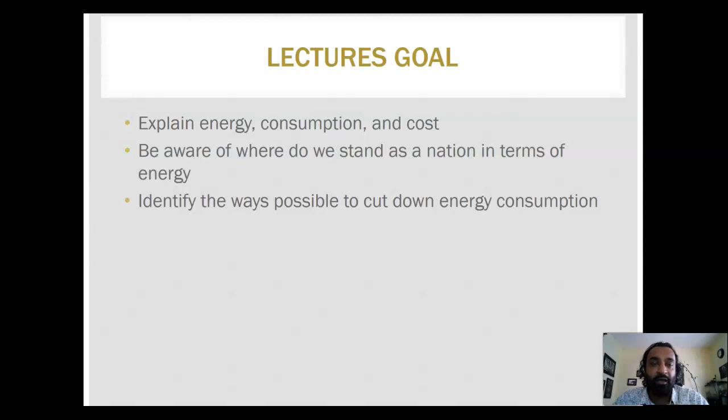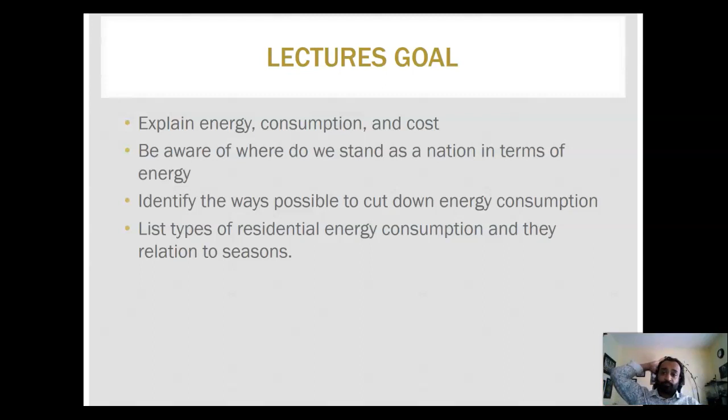What are the possible ways to cut down energy consumption, and what can an individual do? What can an individual do, and what can we do as HVAC technicians? We'll list types of residential energy consumption and their relation to the seasons.

We'll start with home energy. If we think about residential energy from the beginning, we wouldn't be here in New England without proper heating. Probably a lot of places in the south, like Texas or New Mexico, wouldn't be habitable without air conditioning. However, Native Americans did manage to live in cold areas, using simple methodology to cool, heat, or ventilate their houses.

If you look at primitive houses, whether Native American here, or some houses in Africa or Asia, there are ways to heat and cool houses without residential energy. If you look at passive heating and cooling, you can find houses in New England that don't require any heating or cooling system, maybe just a small stove fire. That's something to think about while we design heat systems for residential energy.

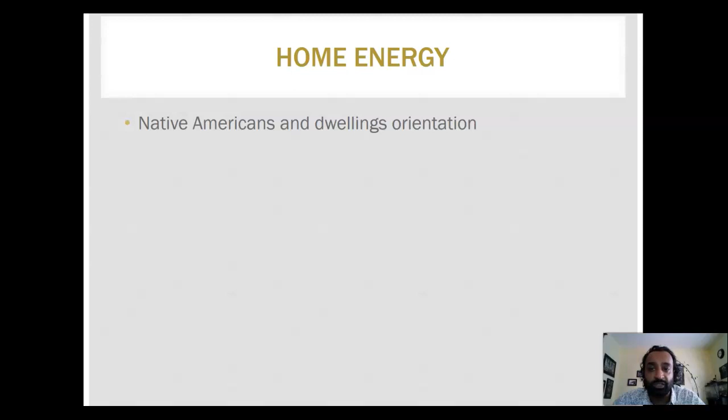They also used white colored houses. The orientation of the house makes a difference in how much energy it absorbs or rejects, and the color makes a difference. If you look at south of Spain, you'll see houses painted white to reflect the sun's rays and reduce energy consumption for cooling.

The chimney effect - if anybody ever had a tent or went camping, they probably used the chimney effect, where a hole in the top of the tent draws air using air buoyancy. It's good to use nature and gravity to move things around, and the chimney effect is based on air buoyancy and density difference.

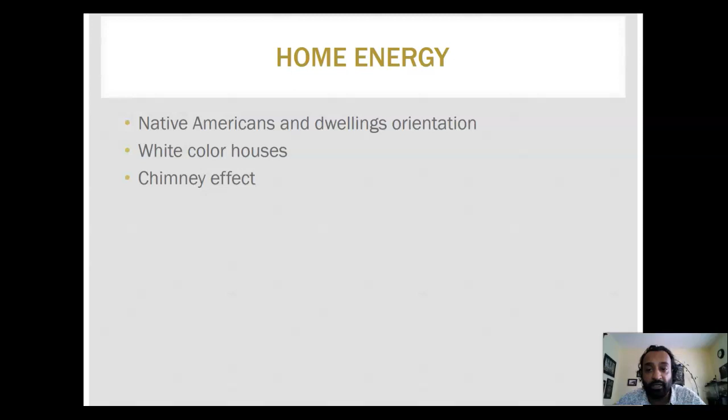We know hot air rises and cold air sinks. So if we have a source of heat in a tent or chimney, it will naturally rise without any need for forcing it out. And as it rises, using the pressure difference, it will pull air in. We'll talk about that elaborately later on.

Building material has a big influence on heating and cooling. How is that? We will see this when we do the little project where we pick up material and see what the insulation is for that material and what the heat transport through that material is.

In the past, people used mud, hay, or stone for construction. These materials are natural, available, and help modulate the temperature inside the house. It's not very practical to mass produce mud, hay, or stones - even though it's still done, the cost is very high. With modern construction, we were able to find new, cheaper, and faster materials to produce, but they came with some drawbacks.

Recently we became aware of our energy consumption. We're trying to retrofit and find material that has better resistance to heat loss and heat gain.

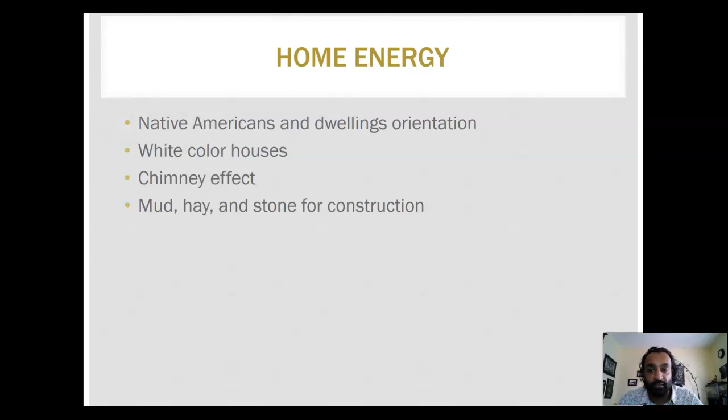As I mentioned, the Industrial Revolution and the boom of housing that happened between maybe the 50s and the 80s - material was cheap, they were trying to do a lot of mass production, and energy was relatively cheap, especially before the 70s. So there was not a big concern for house insulation, or a lot of awareness about greenhouse gases and these kinds of issues with climate change and global warming.

So we were able to pump as much heat as we want - it was very cheap, so we were able to save money by having cheaper, more economical building material. Now this story does not apply, and we have to be more conservative, since there's a lot of evidence that we have reached peak oil, and we cannot sustain producing this amount of carbon monoxide or dioxide.

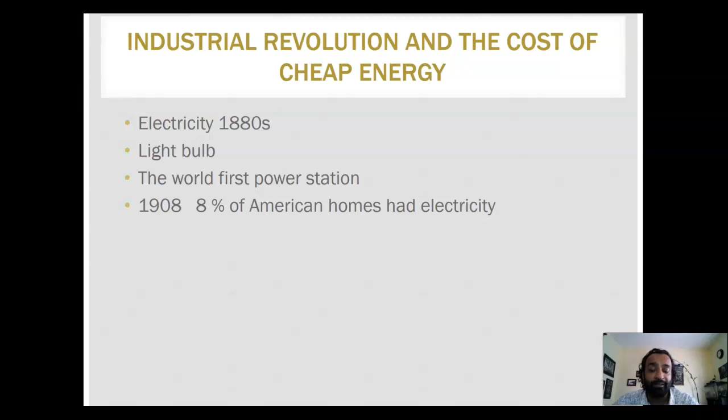Electricity came in the 1880s. The light bulb was invented - more consumption for energy. The world's first power station came in the late 1800s. In 1908, 8% of American homes had electricity - that's really small. Compared to 1925, half of American homes had electricity.

Probably now around 98 or 99 percent of American homes have electricity, so consumption has been increasing as the population has increased. Natural gas started in 1930, and now we have 50% of natural gas resources. The human population in general has doubled in the last century, from 4 billion to almost 8 billion. So that's really a lot of consumption.

So the need for us to be more conservative is there, and to find ways to have a sustainable way to heat and cool the houses.

Today, meaning around 2010, probably 80% of homes have ACs, air conditioners, and it's probably more than that now. There are more needs for people to install air conditioners in New England now than before. As you've seen, this summer, 2020, was the record for heat and hot days, and this will continue, with more temperature every summer. So there will be more need for installations.

It's good for us as a business, but it's not good for the environment. So hopefully we'll find ways to make things a little bit better.

In the US alone, we represent 5% of the world population, yet we use 25% of the world's energy supplies - that's a very big percentage. With globalization, a lot of countries are trying to follow the US model, and as you can see, that is not sustainable at all. As other countries get more advanced and industrial, they try to live the same lifestyle we live here. Meanwhile, we have to correct our lifestyle here to make this power consumption more sustainable.

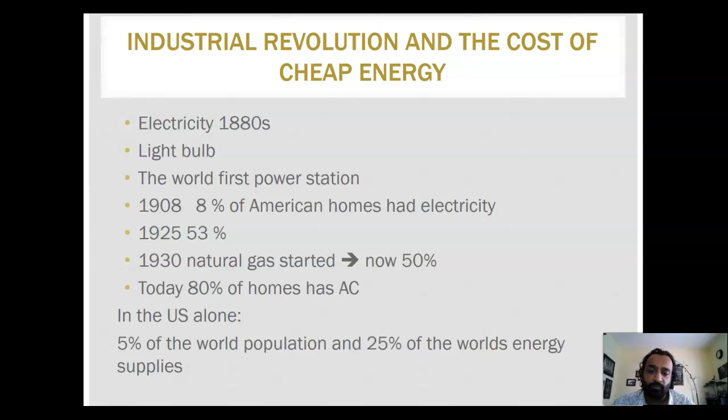Okay, these things can get political. I try to stay on the science and technical part.

So global warming is fact or fiction. There's what's called climate change, which means the cold climate is getting colder and the hot climate is getting hotter, with more droughts and different rain seasons. Everybody can see that. Whether we are the reason for that or the source of it is questionable to some people, but in the science field, 9 out of 10 scientists are sure that human consumption of energy is very responsible for climate change in general. So I think it's almost close to being a fact rather than just an idea.

Greenhouse gases - the use and production of gases increased by 16% from the 1990s to the 2000s, and now we have more greenhouse gases.

What are greenhouse gases? We're not talking about freon or gases that are bad for the environment in that sense. These gases, like carbon monoxide and carbon dioxide, change the composition of our atmosphere, making it more absorbent to heat, so it stores more heat, and the earth doesn't reflect as much heat back to space. We're changing the atmosphere, the layer of air around earth, and this composition doesn't have a lot of interaction with space, because earth's gravity keeps that atmosphere around it.

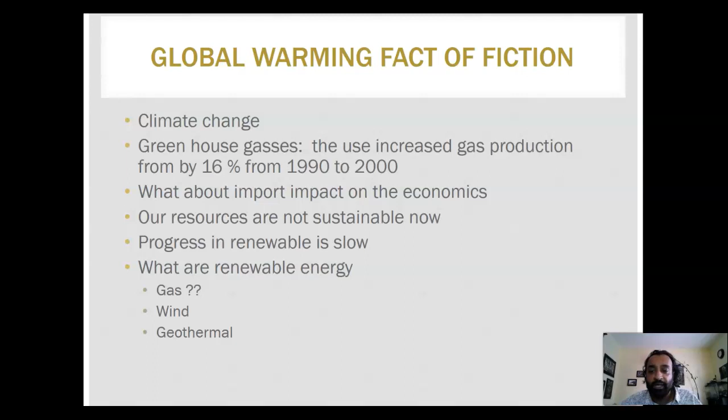Geothermal is both renewable and green, which basically uses the heat coming from Earth to heat, and we can also use that to cool. I'll explain that later on more and how we use geothermal. It's becoming a very popular field. I know a lot of people in New England that are installing geothermal systems. They are on the expensive side, but they are becoming more and more popular and more economical.

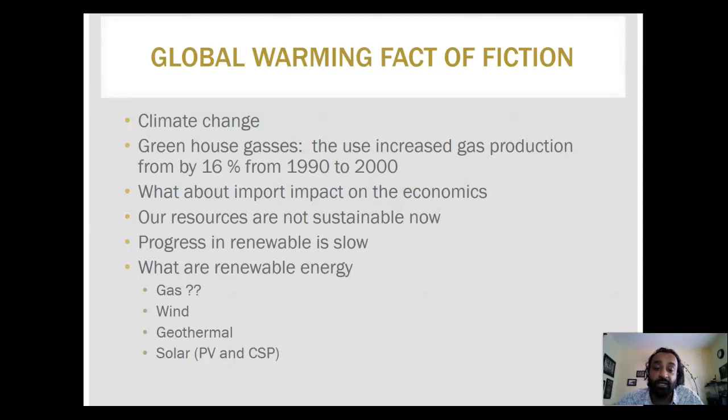Solar has two parts. We have solar photovoltaic - those are the panels you see on roofs, and they produce DC voltage, which is good to be used after being converted to AC inside the house, and it can be stored as well. CSP is concentrated solar power, and it is renewable. It is effective, but it's not very useful in New England because we don't have a lot of sun heat here all months. But it can still be used on a seasonal basis.

If you let me use the pen.

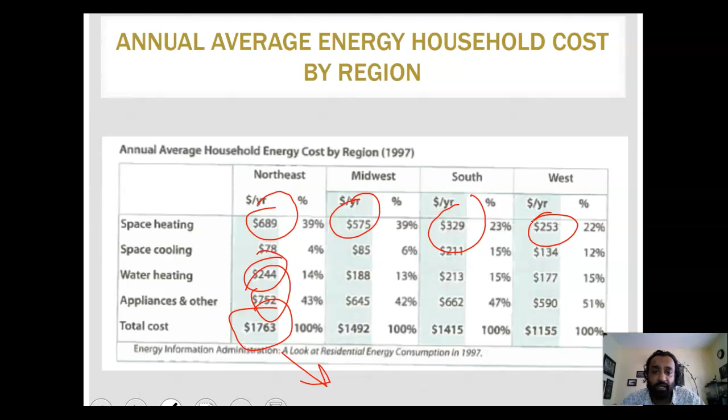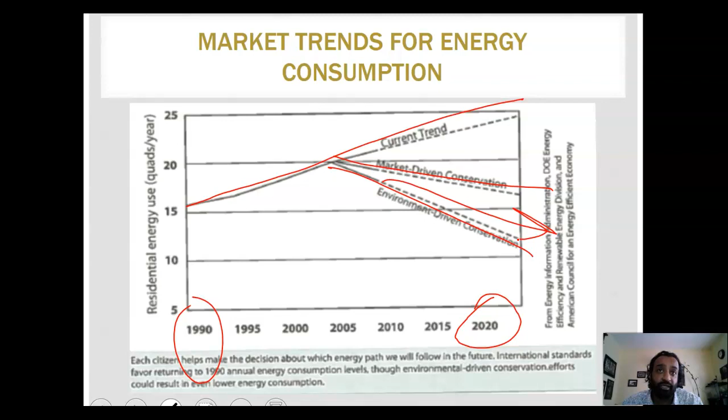We'll talk a lot about insulation. How is that very important? It's something you do once, but it will save you a lot of money in the long term.

Energy types in the U.S.: we have coal. We said coal is still king, we're still burning a lot of coal. Gas is becoming more popular. Gas is much better than coal or oil for heating because it burns better. What does that mean, burns better? Well, it means there are less harmful gases and less CO2. So if we have to burn fuel, gas is one of the best sources.

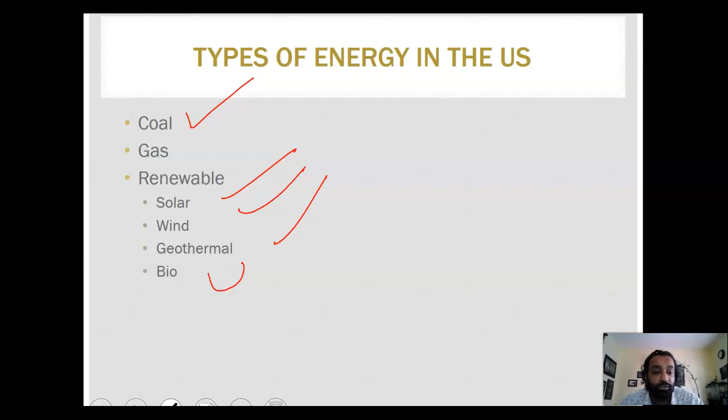Renewable, we have solar, we have wind, we have geothermal. We also have a lot of biofuel. Biofuel could be considered biomass. There is biochar, which is kind of like man-made charcoal that you can use to fuel for heat, or you can use biodiesel, which is basically frying oil that has been recycled and used to heat a house.

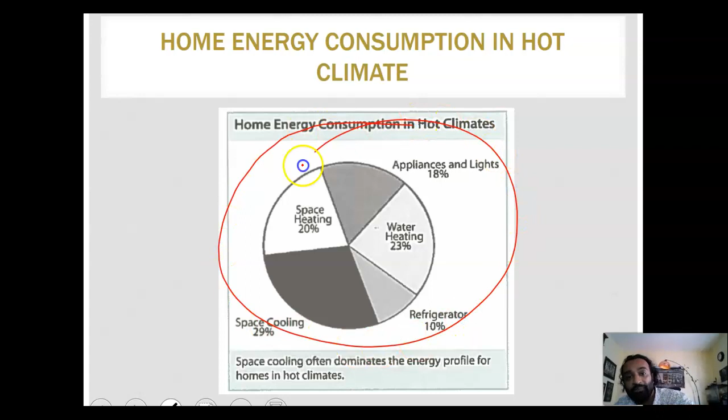Appliances and lights are getting really better, especially with LEDs. We have a lot of LEDs now, and it's doing great work. Refrigerators, that's something we cannot do without, it's something we need to have. But when we go over appliances, we can see there are ways to reduce the power consumption for fridges. And this is water heating, which also has a lot of nice leaps in heating water without a lot of footprint.

There's a lot we can do to conserve energy, and I would love to say we'd like to conserve energy and change our lifestyle without impacting it too much. If you tell somebody we need to save a lot of electricity, but you can't shower as much or you can't do this as much, probably you're not going to get a lot of response. It's better to keep people's lifestyle, do small alterations here and there that aren't noticeable, than to make a drastic change. There are small changes we can do that won't impact our lifestyle, and especially if something has been a habit for a long time, it's really difficult to change that.

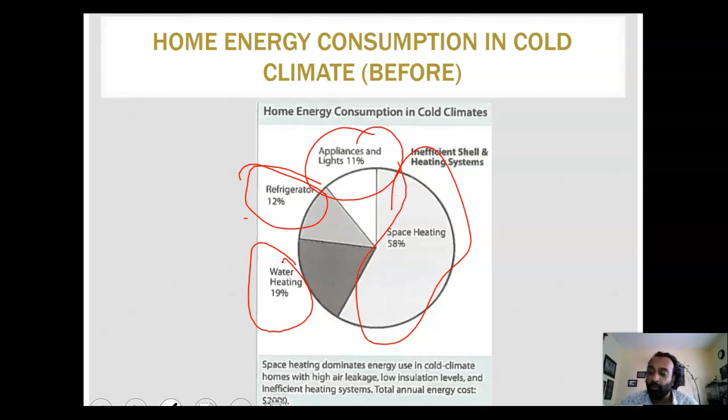The other point of view is, if you tell somebody, hey, this window is costing you a lot of money, but it will cost you $2,000 to change, he or she will be more reluctant to change it. That's why Mass Save will offer a lot of rebates when you try to change a window or do some insulation.

Inefficient shell in general, overall we're using a lot of energy for heating, refrigerators and lights. This is if you have an inefficient system. This is what you do before updating your appliances and before doing insulation.

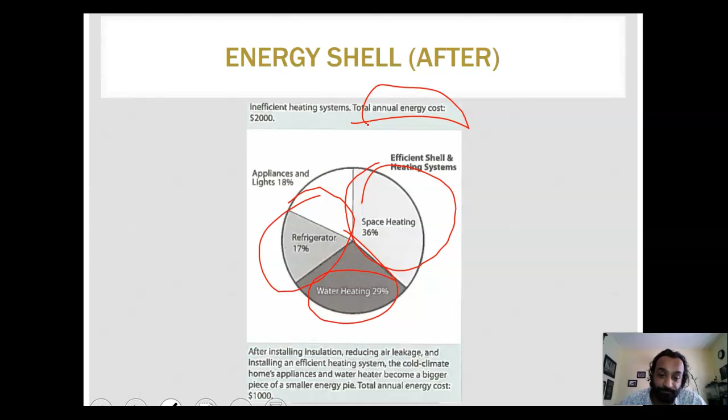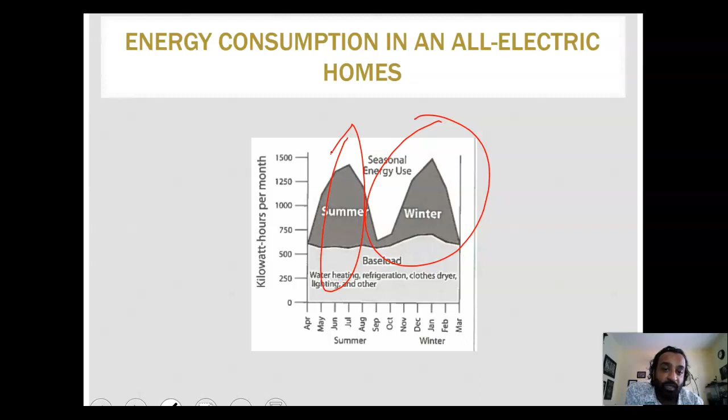If you look at this, and if we notice, probably this isn't the same in every state, but winter is very rough in New England, and that's when you need a lot of power consumption. The fall and spring is when power companies are doing a lot of renovation because they're not working as much. Summer probably has some peaks in power consumption because of air conditioners. So probably this summer, the months of July and August, we had really a lot of power consumption, and probably the end of December, January, and February, we had a lot of consumption also for winter.

So potential conservation means things we can do. As technicians, there are options for us. We can do thermal improvement - better insulation, better material for heat gain, and we'll talk about that in more detail. I highly advise you to buy the book and use it as a reference. It has really good information you can use later on after you graduate.

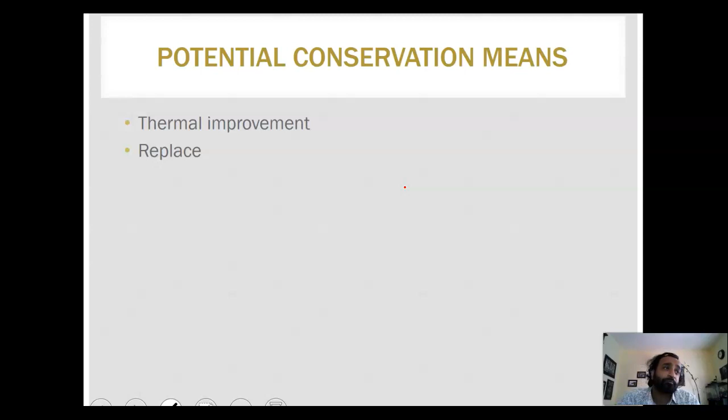We can replace old equipment. There's a lot of appliances that consume a lot of energy, and people don't feel the need to change them because they're running. But the running cost is really high, and it's very ineffective to keep that. People have attachment to their appliances and say they'll just pay for the cost, but sometimes it's better and more efficient to just change. There are a lot of incentives to change appliances, heating systems, and cooling systems.

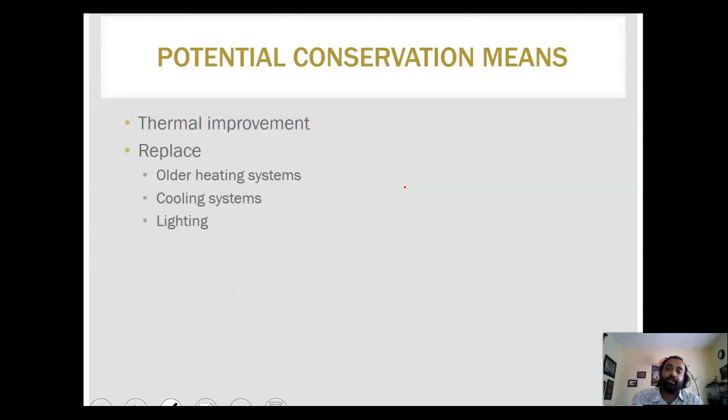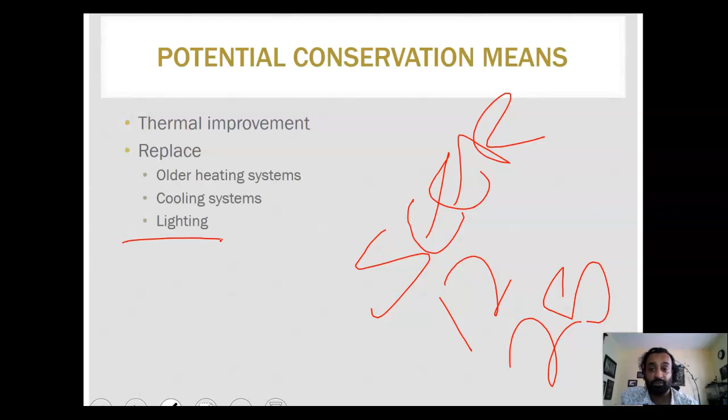SEER, the seasonal energy efficiency ratio, has improved a lot. In the past, you'd get a SEER number of 12 for ACs. Now you can get up to 25. That's double the efficiency, which means half your energy bill. That's something really effective. Lighting - you cannot imagine how much money you'll save if you change your lights from incandescent to fluorescent, or from fluorescent to LEDs. I'll talk about that in a whole chapter.

Electrical devices - what do we mean by that? Like computers, TVs, and I'm sure everybody now has an LED or LCD TV, which is way better than the tube TV. As for appliances like ovens, washers and dryers, it's always better to upgrade those things if they're more than 10 years old.

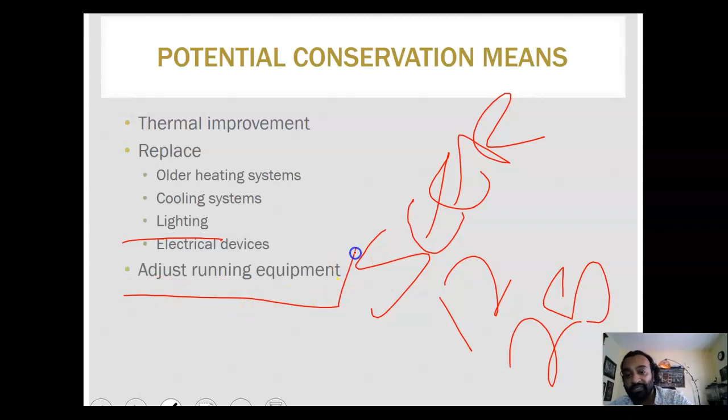Running equipment is another thing. I don't know if you've heard about smart grids or smart metering systems. There are ways you can control when equipment runs, for example washers and dryers, especially equipment that consumes a lot of power. In some states like Maine and Texas, they have smart metering where you can see the power cost during an hour of the day, and program your washer or dryer to run during that time.

Running equipment during peak time is going to cost you more than during low time. If you look closely at your energy bill from Eversource or whatever you have, you'll see there are different pricing schemes, and there's a lot of information that can help you improve your efficiency.

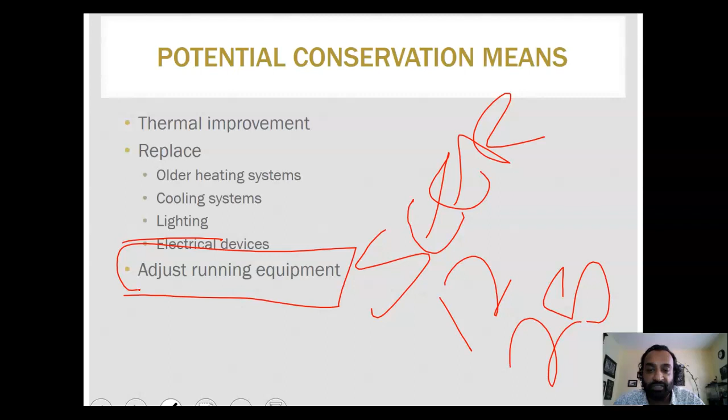We can also inform and educate occupants about the cost of energy. The human factor is really huge. How do people react when it comes to energy? How do they behave - do you leave things on that you don't need? Using sensors, using timers - these are all ways to cut down energy consumption. And it does add up.

Paying $300 a month for power is a lot. You can reduce $300 to $70, and it is possible. I know students who used to spend $700 on energy bills every month. After doing a few adjustments, he was able to lower that to $150. That's huge, and I think it's a good saving for your money, and also good for the environment. So if you can deliver these messages to people when you're installing equipment or educating them, you'll probably get more response in getting updated equipment and better installation.

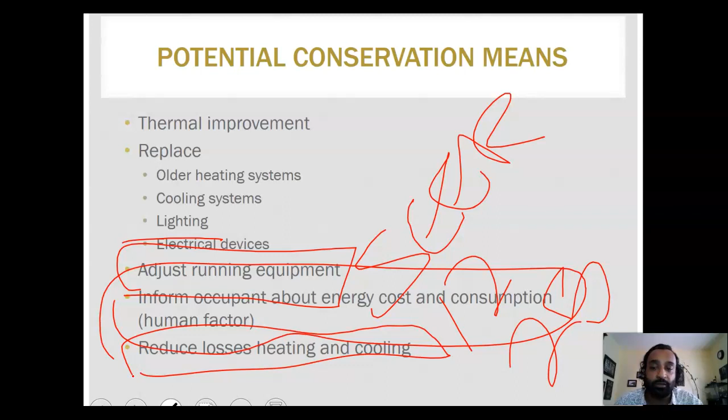Reducing losses - we are going to cool and heat, and if we can reduce the losses from the source, which is the air conditioner unit or the furnace, to where you need it, that would be great. We'll talk about the first and second law of thermodynamics, that you have to account for everything you produce in the system, and we'll discuss that further next week. But I just want you to think about that - energy is money, and you're paying for every part of it, and you don't want to lose that between the cracks.

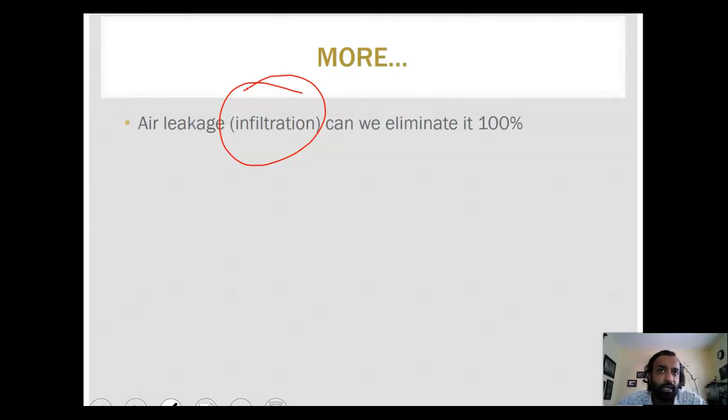Something we also have to think about is air leakage, called infiltration. There are two types of heat loss in a house: transmission, which is heat lost through solids - your walls, glass, floor, roof - and air leakage, the holes inside your house and how much air exchange you have to the outside. Can we eliminate it 100%? You can get close to 100%, but do you want that? No, the house should breathe and you should have the proper exchange.

We'll talk about that again - there's a whole chapter about it, covering what the minimum requirement is for air exchange to the outside to maintain a healthy environment inside the house or building. Also, we'll talk about hot water storage.

Do we need to store water? We'll do some calculation. When you store water, it's going to lose heat over time, so you're basically losing energy as you go. So do we need to store water or just heat it on demand?

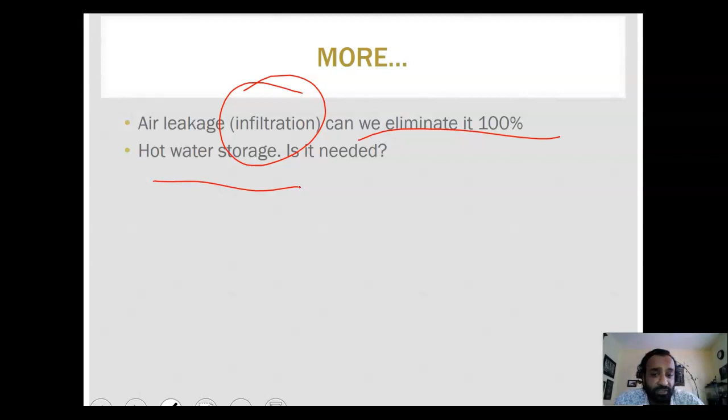I'll give you some options as well. Equipment maintenance is very important. An AC that hasn't been maintained every season probably isn't going to perform as it should. The SEER we talked about keeps getting lower if you don't do the maintenance and proper tune-up. Same with the boiler - if you don't clean it and do proper maintenance, it will lower its efficiency. It will run, but not as efficiently as possible.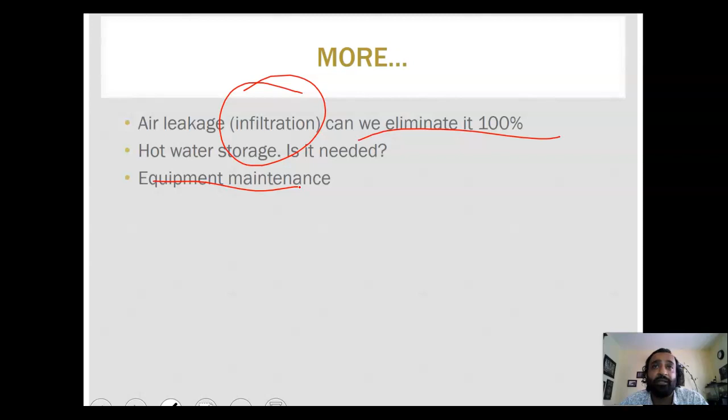I'll give you an example, and probably you've experienced this. You buy a new car, the MPG is very high. After 20,000 miles it still runs, but the MPG will go lower, from 30 to 27. Another year it will be 25, and so on, until 5 years later you might not have done much maintenance on the car. The car might still run, but you'll have really bad gas mileage, and it will have affected the engine and transmission. So following maintenance, even though people don't do it, there's still an impact. If you do the math and think about how much it would cost if it broke completely versus doing proper maintenance, you're probably better off maintaining it all the time.

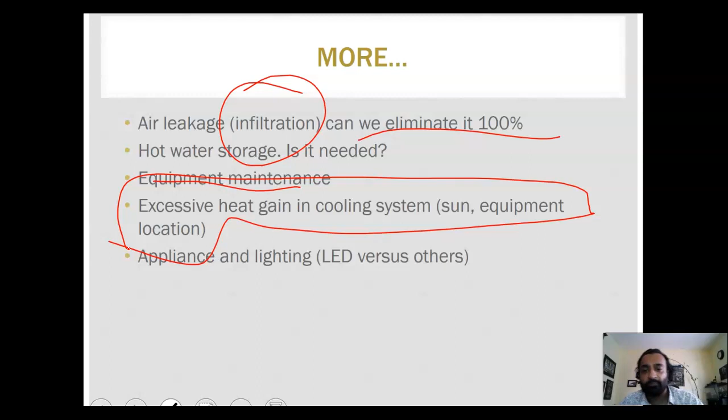LEDs and lighting - this is another area we talked about. How do you change equipment to produce less, to consume less energy and have higher efficiency? Our behavior, again, is the human factor.

Is it realistic to have all these changes? Yes, we have to make it realistic, and we have to make it small. We don't want to do drastic things, just little things here and there. Something consistent and continuous is better than something huge that will eventually be discontinued. So I know not everybody wants to give up the truck and drive a Prius, but you can find something in the middle. You can also have a truck and a Prius, and use the truck for some events. It's about optimization - let's call it that way.

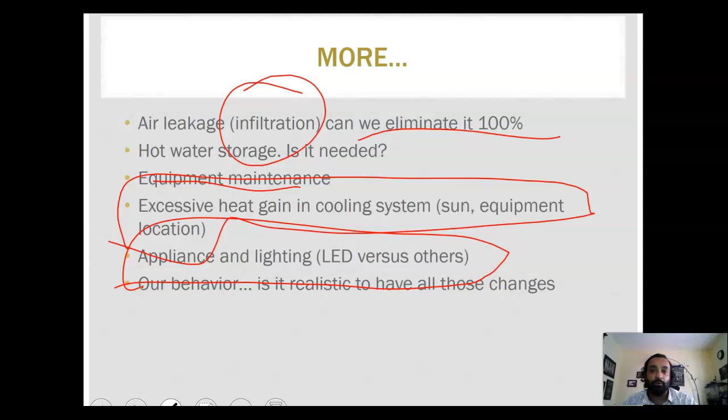Let's optimize our behavior. Okay, so we talked about energy consumption. Why do industrial countries consume more energy? We talked about that - we have different needs, and at some point we just didn't care, and we didn't continue on a path where we care more about long-term effects.

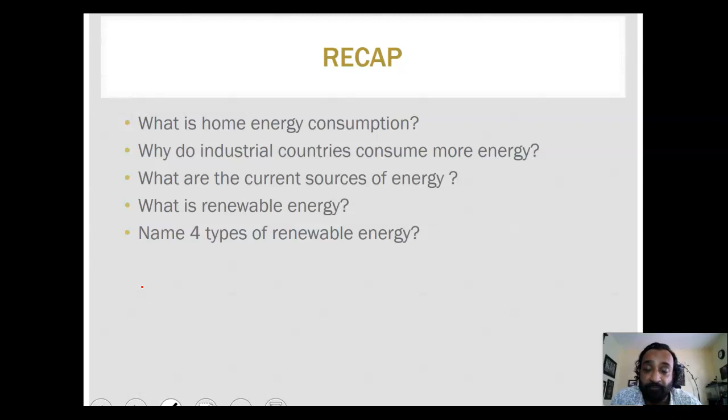If you find this subject very interesting, I think it will be worthwhile for you to work as an energy auditor - there's really good job potential. If you want, we'll talk about that during class time. I can tell you the possibilities for jobs in energy auditing and retrofitting installation.

What are some of the energy wastes in residential heating or cooling? Some of the waste is running equipment where we don't need it, and a lot of leaks - we have leaks and energy losses where they're not supposed to be, and that could be easily fixed.